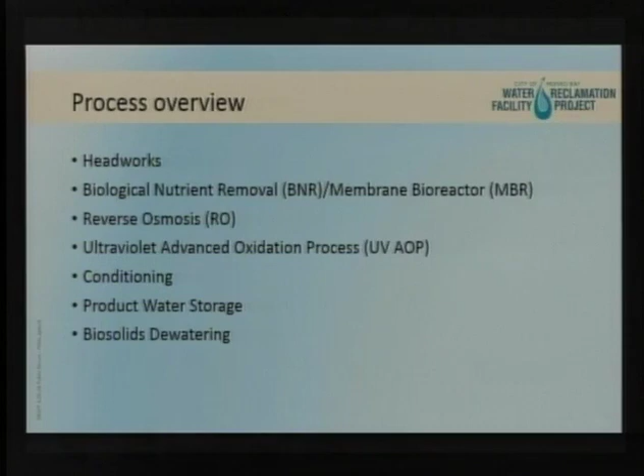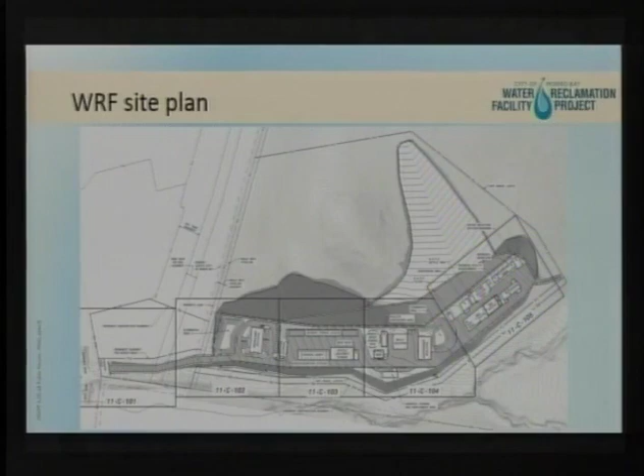So you have a fully redundant unit for fine screening, coarse screening, and for grit removal. Any specific questions we can answer on this?

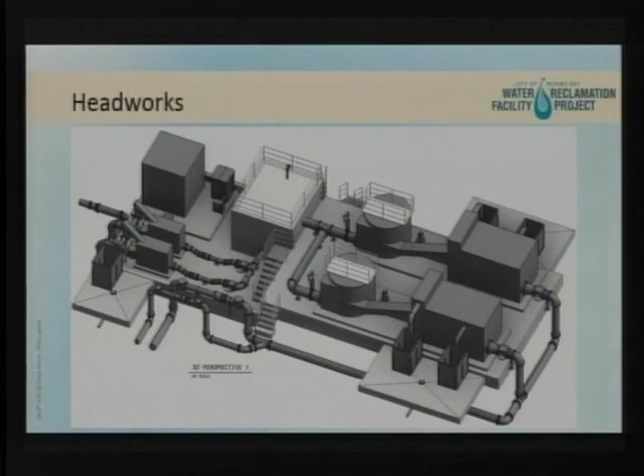I was looking on my iPhone, on my laptop, and it looked like it was going to the RO tanks prior to going to the MBRs. I would have thought the RO happens after the fact. There is an RO feed tank ahead of the RO that provides some buffering, so that you're sending a constant flow to the reverse osmosis, but it's not the actual RO units themselves. I assume that's after the MBRs. That's after the MBR. Yeah, okay, thank you.

Thanks, Steve. Anything else? No. Go ahead when you're ready.

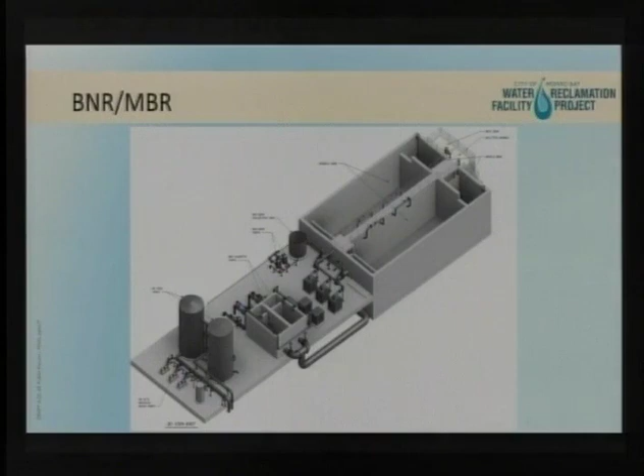We then move on to, and we'll talk about them together, the reverse osmosis system and the advanced oxidation process. This is really the clean water side of the house as it pertains to our particular project and process.

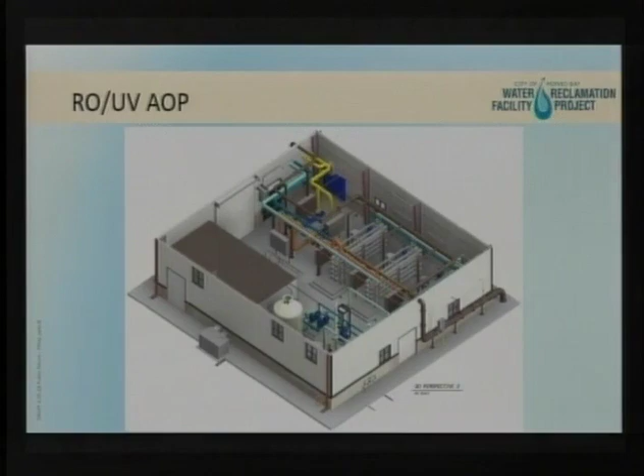I got a question on that one, Eric. On the UV process, is that the only form of disinfection being used, or is there chlorination? Is there a dosing tank somewhere along? We will chlorinate the water going to the outfall. So you're chlorinating the stuff out to the brine? Correct, yeah, we're not UV treating that.

But you're not UV treating the water going to the IPR? Yeah, we also have to disinfect that water. So other than UV, you're going to do chlorination as well. Yeah, it's part of the regulations for the Division of Drinking Water, part of our process for getting there. Like I say, I had a little trouble trying to follow everything, looking at a lot of plans.

Since we were stopped here, if I can interject a question - I thought I'd heard we were going to have some sort of photovoltaic system. Is that still on the table, or is that not on the table? We've set aside area on the site for about two acres of photovoltaic. Likely, when we do that, it'll be through a power purchase agreement rather than us building the facility ourselves.

I have one question - I know there's two enterprise funds paying for the whole project, but is this the point here where we start putting it all on the water side? So the project is split basically 71% wastewater, 29% water. So this is really going to the water cost, the majority of this side of the project.

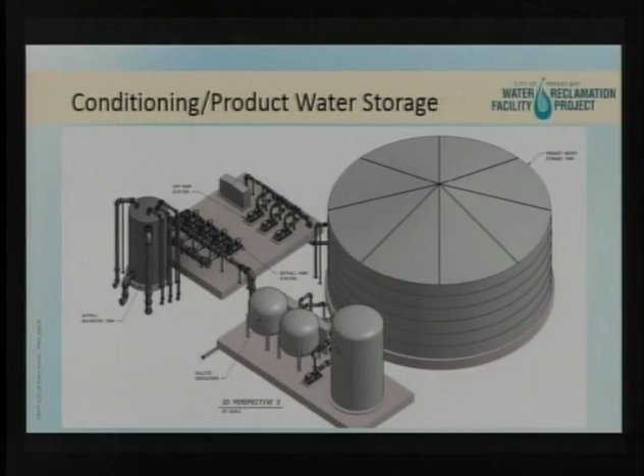Can I ask you, Eric, the calcite treatment, will that take care of adjusting pH? Oh, correct. We also have pH adjustment throughout the treatment process.

Another question—this tank is capable of handling about half a day's worth of effluent? So it's capable of handling 500,000 gallons, and the treatment capacity on the potable reuse side is just under 1 MGD. When you take into account the losses for RO—we're planning around an 80% recovery for our RO system—right now it's a little more than half.

Anything else? No. Okay, go ahead. Thanks.

Then they pass through a mechanical piece of equipment sitting underneath that canopy that takes sludge that's more than 99% water and removes a lot of that water to get it to a consistency of about 20% solids, where it can be picked up and hauled away by a hauler and used for things like composting, or for a while, alternative daily cover at landfills. Those residuals are taken from the site and disposed of.

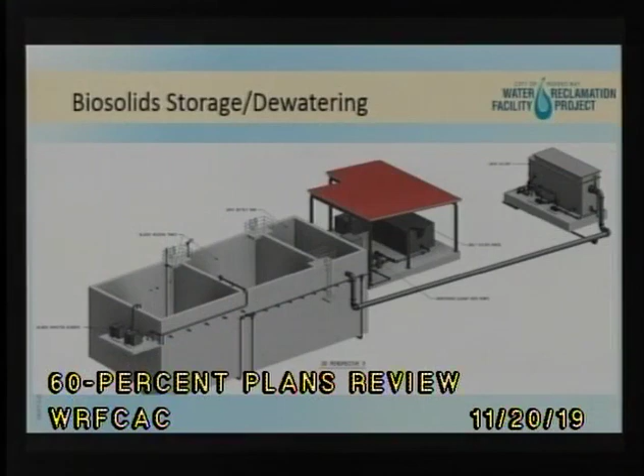Now, you're not doing any digesters with this particular plant? That's right—it's just activated sludge; it comes over, you press it, and throw it in the bin to dry. Correct, we don't have primary treatment. It's pretty common for smaller treatment plants—depending on the treatment process you employ, if you don't have primary treatment, you don't usually have conventional anaerobic digesters. Oh, okay, good deal.

Any questions about the chemical storage facility?

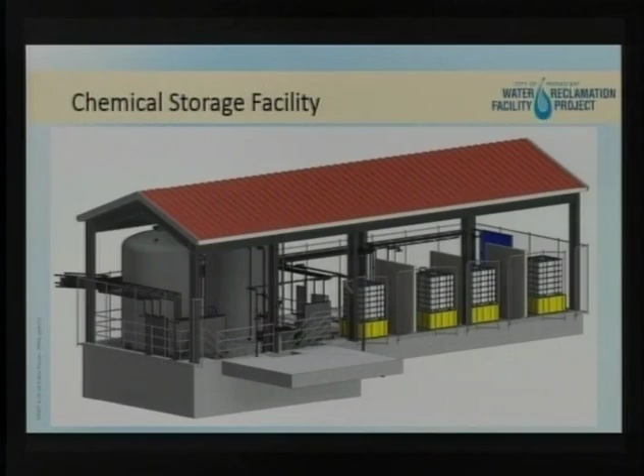Normally a building like this, if it was enclosed, would be in like an H occupancy. So the fact that it's open on all four sides, does that get it out of the H occupancy and just give you a U occupancy building, or how does that work exactly? I would need to get back to you on that specific code question. The only reason I ask is the distance to other buildings and distances to other things. Yeah, I can definitely get you the answer to that.

If there were a chemical spill at this location, is there some containment around this area, if someone dropped something off and it spills? Yeah, it's not shown here, but it's shown in the drawings. Probably not seen as well in the site plan, but if you look at the non-isometric views of this facility, you can see there's a concrete area with a containment sump located where the chemical deliveries would be made.

Any other questions? Not right now. Good. So I did want to give a quick update on a couple of different items as it pertains to the water reclamation facility. These aren't necessarily directly related to the 60% design, but I just wanted to give a quick overview around the permitting requirements specific to the water reclamation facility, and we'll go through some things on the conveyance facility.

So in terms of this, this is kind of the gambit of permits that may or may not be required for a facility like this, and this is the list that we started off with, and as I go through here, we can address each of these.

So this permit, while it is outside the city limits, we're holding it to the city's stormwater requirements. They're using our LID manual, which is very similar to the county's for their urbanized area, but it's outside of a county urbanized area. So technically it could be argued that it doesn't require a stormwater plan, but since it may eventually be annexed to the city, we wanted to make sure it complied with the city's stormwater requirements.

Also from the regional board, one of the things you may notice from the drawings is an erosion feature that was identified on the treatment plant site.

Through consultation with the Regional Water Quality Control Board, it's determined that it's not jurisdictional to the Regional Water Quality Control Board, so no Section 401 permit is required. Similar is true for the Army Corps of Engineers. We've been consulting with them over the last year, and we also do not need a Section 404 permit since they are not taking jurisdiction of that erosion feature either. The same is the case for California Department of Fish and Wildlife. A stream bed alteration permit is not required for that erosion feature.

Now, not all of these things hold true for the conveyance facilities, which we'll talk about in a second, which is a separate permitting effort. We also have a number of air permits that are required.

From the San Luis Obispo County Air Pollution Control District, we have naturally occurring asbestos on the site, so prior to the start of construction we need to get that naturally occurring asbestos permit, and we have that permit.

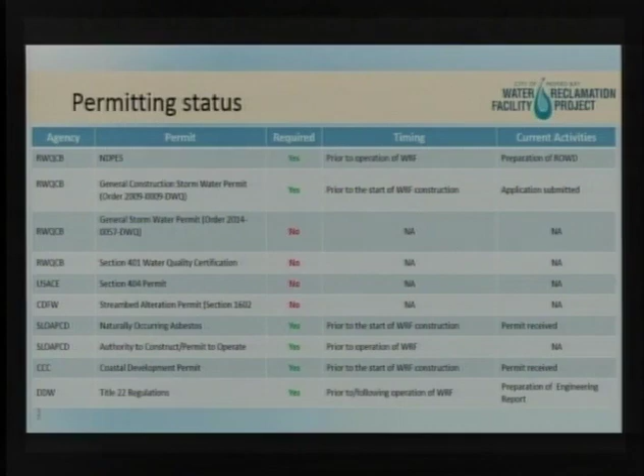Do you also need something from the Division of Water Rights too at the State Board? I don't believe so. No.

In terms of property acquisition, there are really two pieces of property the city is accessing or needing for construction of the water reclamation facility. The Tri-W property purchase agreement has been finalized, and the city's currently in escrow. One of the things written into the purchase agreement was that the city has the ability to access the property and start construction before escrow is completed, so closing of escrow doesn't have any impact on the construction schedule.

For the Martz property, we need some easements there, both temporary and permanent. The city negotiated right of entry, and that's been finalized for those, so the city has access to that property as well.

And where's the Martz property, actually? In between Teresa Road and the Tri-W property.

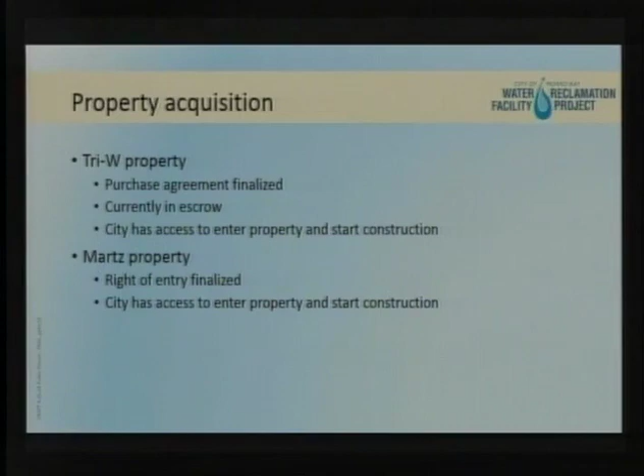So it's to get from the end of South Bay Boulevard up to the property. Correct. The permanent piece is the road, and then there's also a temporary construction easement that we are going to use for our laydown and trailer storage area.

Maybe I was looking at the conveyance site plans wrong, but when it gets close to the roundabout, it looked like it was crossing what is possibly a future CVS. Is that going to be on private property, or in the PUE, or was it going under the proposed parking lot for that CVS that nobody's heard about?

As part of the conveyance system project, there's a couple of pieces of right-of-way or easements that we'll need, and that's one of the locations when we go through the conveyance system portion of the project. Eric will address those particular project needs. But yes, you are correct, there will be a need for easement there where we cross that corner.

Is there any idea of when that CVS is possibly coming? That seemed like a surprise to me when I saw it on the site plans. That's a private development project.

They have not submitted a formal application to the city yet, so stay tuned for that. It'll be going through when you wear your other hat, you'll be able to look at that project through the Planning Commission. But that won't affect the conveyance project at all. So anything we approve for the CVS would be contingent upon allowing us access. Correct. Okay.

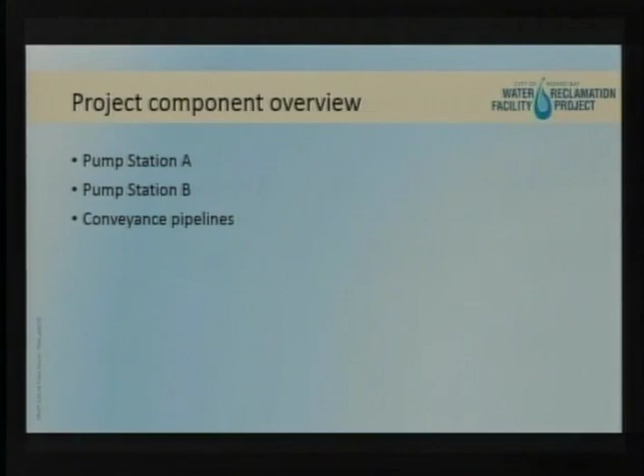So we'll move on to the conveyance facilities. The project components essentially have three main parts: pump station A, pump station B, and the conveyance pipelines. Those are the three larger components. This is essentially a schematic of the way the city's collection system will operate with the new treatment plant and these two new pump stations.

And it shows in the drawings how the city's existing lift station number 2, located down at the Embarcadero, interacts with this new system. It will pump directly into the force mains that go to pump station B, and then the city's existing lift station number 3, that brings flow back to the existing wastewater treatment plant, will tie into the new force mains coming up South Bay Boulevard from Quintana. That lift station is located at the corner of South Bay Boulevard and Quintana.

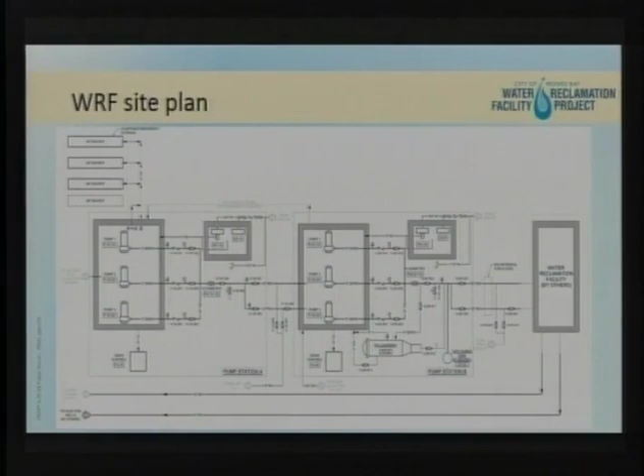Eric, in this one, I think originally before they went to 2 lift stations, the idea was to have everything here. But when you have your high winter flows, you had several pumps in there, like 4 extra pumps, I believe. But didn't they all need to be down at the lower level during wet winter flows when those have to kick on? Are any of those in this configuration?

No, I don't believe so. I'd have to go back and look at the basis of design report regarding the number of pumps that were going to be located at this facility.

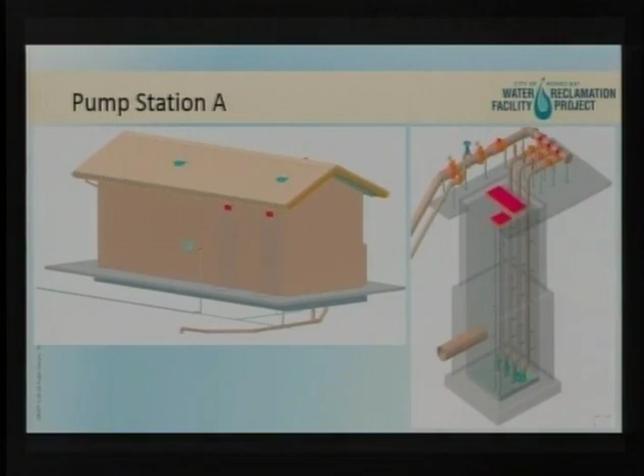I just wanted to make clear, because when I was looking at the pump stations and how they're set up, pump station A is not putting a ton of hydraulic head on the water as it gets to B, and then B is like this massive pump that kicks it all the way up. I assume the reason you're keeping pump station A low is so that lift station 2 can actually get into the pipe and not have to overcome that head. Is that a safe assumption?

Can you rephrase that one more time? You're saying the depth of lift station? Well, lift station 2, I don't know if it has the hydraulic head to overcome what's happening at B. It probably does with what's happening at A. Is that the reason? Yeah, I believe that's correct. Oh, okay.

It breaks to gravity. Okay, yeah, Mr. Miller just corrected me. There's a small change. We're actually breaking the lift station 2 force mains into the pump station and breaking to gravity there. So we didn't... I'm sorry, it's breaking to gravity, but what I mean is you had to put it in prior to the pump station because it couldn't overcome the head. The head is so high on that one.

The only other thing that caught my eye looking at your energy grade lines and hydraulic grade lines running across there is at the high point in Quintana, it honestly looks like you only got about 5 or 10 feet of head at the low condition. Are you comfortable with that?

I'd hate to see it go to vacuum, and that's something we're looking at. We're also in the middle of, and very close to completing, our surge analysis, looking at all the requirements for the air vacs and any other issues. So you noticed it too? Yeah, that's all I'm trying to sort out here.

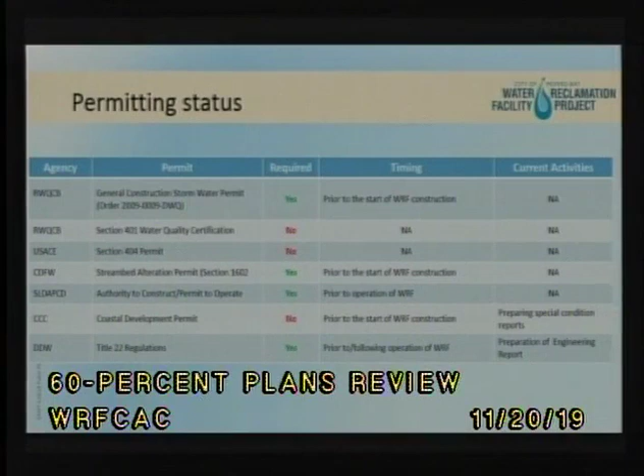Couple more permits, again, like the water reclamation facility. We're also going to need the authority to construct and the permit to operate permits for the two emergency generators there at each of the lift stations.

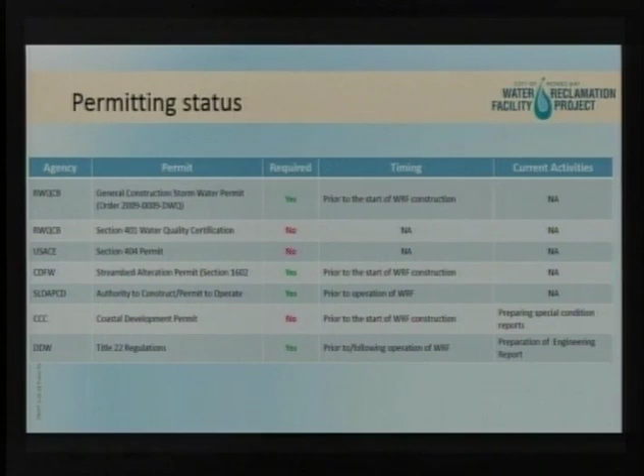Again, the coastal development permit - that's not correct, the coastal development permit is required for all components of the project, and as I mentioned, we're going with a phased approach, with them kind of doling out their construction authorization on a project-by-project basis as we're ready to start construction for the different phases of the project. And then for the Title 22 engineering report as well.

In terms of property acquisition, I didn't have the private property listed on here, but we're currently working with both Vistra Energy and PG&E to acquire the necessary easements for construction of the pipelines. There's a process we need to go through for the PG&E easements through CPUC, and we're currently working through that process now.

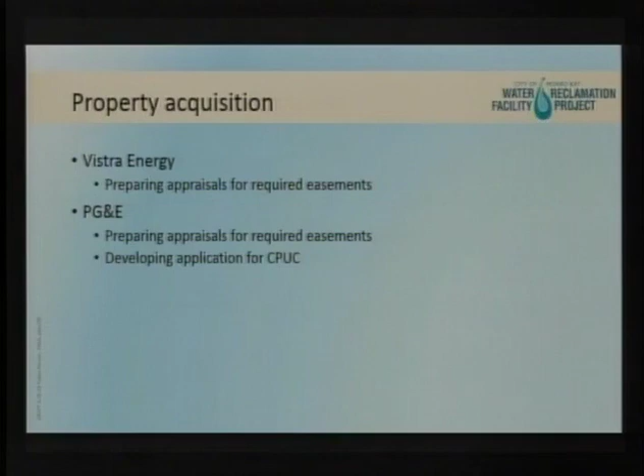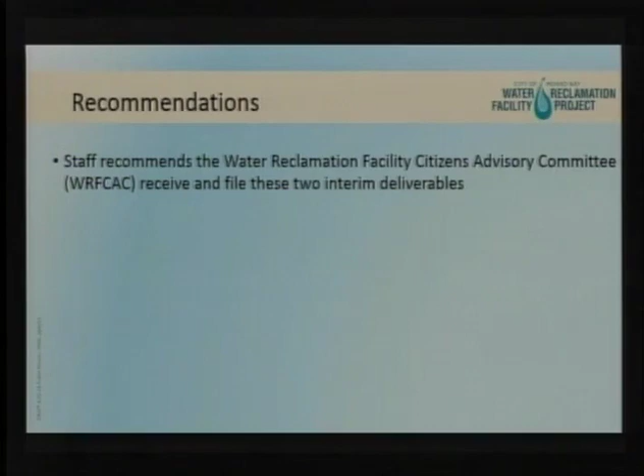And that is my presentation. If you guys have any other questions, any specific questions on the conveyance facilities, on the WRF?

Okay, I did have one more question. It's actually on the front end, the actual site itself, and I have to agree with the guy who stood up in the public comment portion, because as far as grading plans go, I don't think that thing's anywhere close to 60%. All I see is proposed contours and a site plan basically. I assume you have a soils report, or whoever is designing it does indeed have a soils report, because we've seen enough consultants come through doing most of these things. But I did notice they also use 3-to-1 slopes on the backside, so I assume that was predicated based on said soil report rather than going steeper and minimizing grading somewhat. So I assume there's a soils report going on here.

There's actually two soils reports. The city did what we call a program level soils report back before the RFP was issued for the design build teams. So the design build teams needed enough information. That soils report is not necessarily suitable for final design, but it was enough for them to go back and say, okay, we can price the cost of this earthwork and the construction of these basins and everything else based on that. They've done a confirmation geotech report, so they've gone through and said, let's set aside the programmatic document for a second and let's go through and do a full-blown construction geotech report for the entire site.